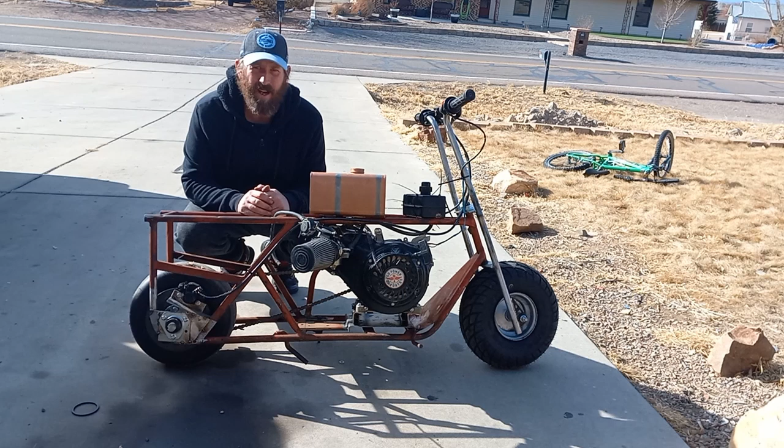Today we're going to try to get a fuel system put on this bike. Apologize for the wind - it's this or snow the next few days, so this is what I got. This little tank here works, but I don't like the way it looks. I want it contained in the frame, and I want to fill some of the void in the frame. So I got this old Briggs & Stratton tank that I found in my grandpa's basement, actually, and we're going to mount it in the frame right here. That's going to make our outlet for the fuel lower than the carb, so we're going to throw a pulse pump on there as well. Let's get to it and get this fuel system put in here.

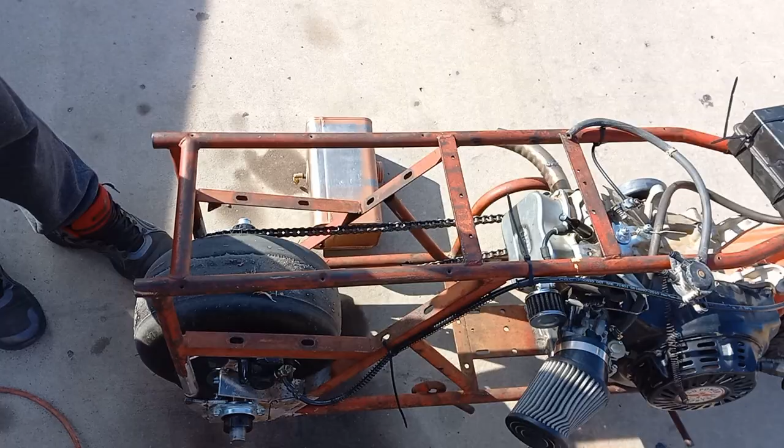So now I'm going to be doing some welding. The first thing I'm going to do is clean the paint off around this rectangle here, because I want to center that tank in there. So I'm going to clean up the metal around where we're going to be working first and take some measurements.

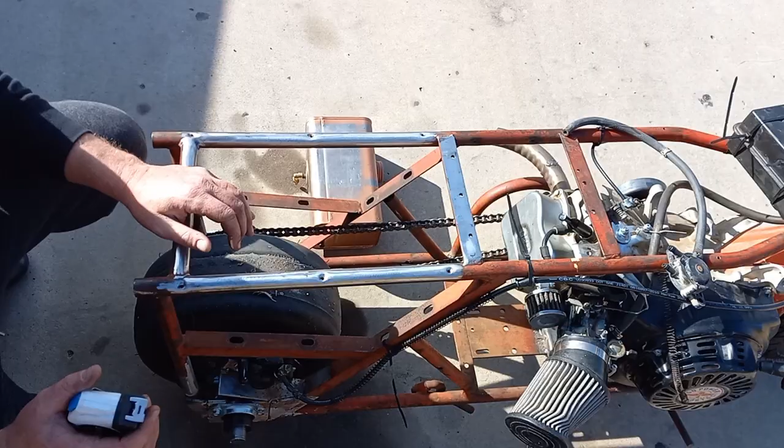All right, we got that all cleaned up. Now we're just going to mark center on these two here and these two, and it's going to be in inches. Just kind of go from the center of the bars.

Close here, about 9 inches, so we'll mark this one at about 4.5. 9 inches, let's get 4.5 again. So this way we'll go from this bar to the center of that one, right up against it - 14, 7 inches. About right there. 14, so 7 inches, be about right there.

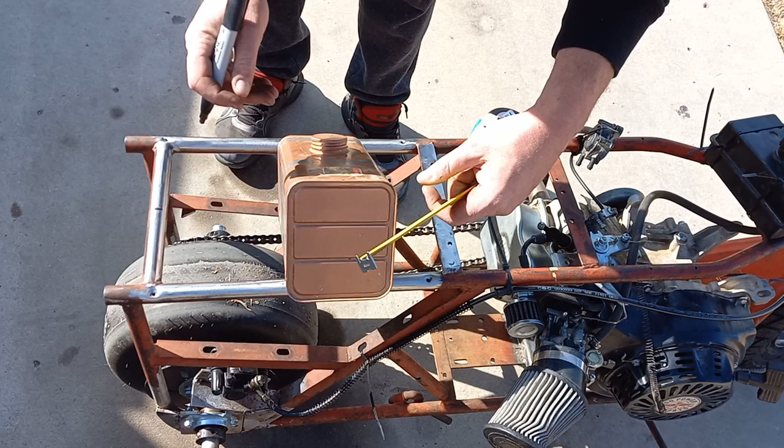And we'll do the same to the tank here. We got 4 3/4, half of that is 2 3/8. Mark it there, and we'll mark it there. Now we'll do the same along this side here. We got 9 3/4, be 9 3/4. Half of 9 is 4.5 plus 3/8, it's going to be 7/8. 4 7/8 there, 4 7/8 there.

So we got our center of the tank. What I'm going to do is just eyeball line up those marks as we go here. I want that tank sitting right in there like that - actually, probably turn it this way. I want that tank to be sitting something like that by the time we're done here. How are we going to do that? Well, I picked up the flat bar here. I'm basically just going to make a saddle for that tank to sit in, and then I'll bolt the strap across the top. We should be happy. So let's get to it.

The first thing I want is the distance between the bars here. We got 8 1/4 minus our tank, which now I'm getting 4 13/16. Math, stupid.

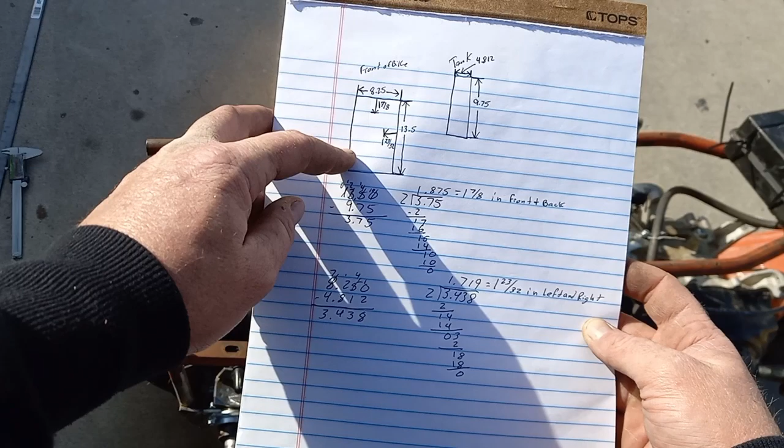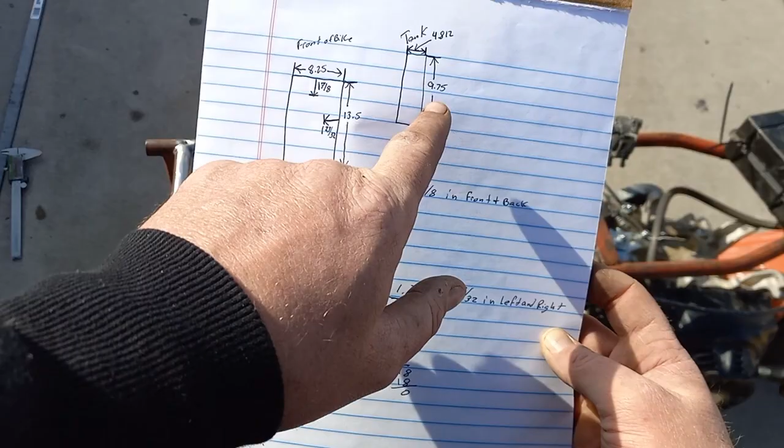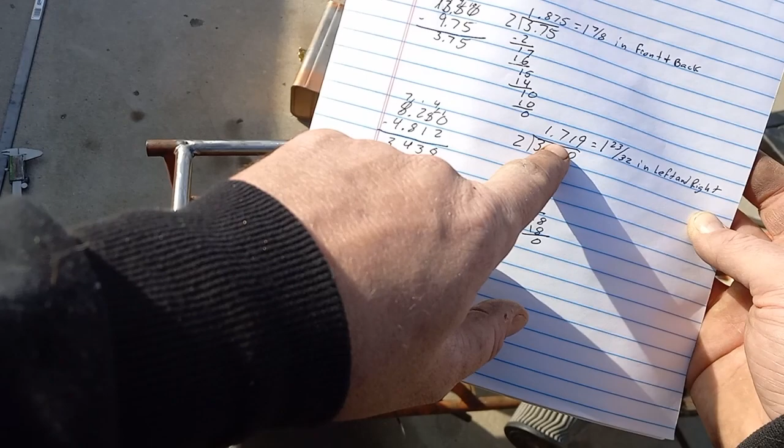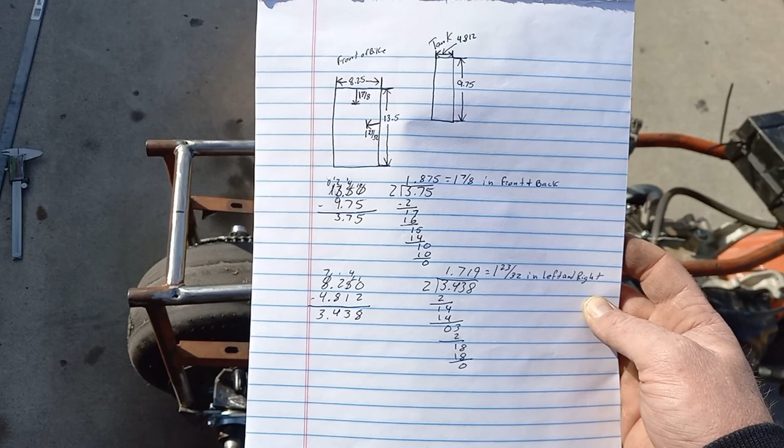All right guys, so I took a second to take some measurements and do some math. This is what I come up with here. So this here is the frame, 8.25 wide, 13.5 long. Here's our tank, 4.812 wide, 9.75 long. So I took the widths and subtracted them here, and that gives me how much space I'm gonna have between the rails and the tank. Then I divided it by 2 to get how big the gap's gonna be on each side, and that's what I came up with there. Did the same thing for the length - length minus the length divided by 2 gives me this, and that's how far it's gonna be from this rail and that one. So I don't know, math, could be wrong, but it'll get me in the ballpark. Math, stupid. So let's just get started here.

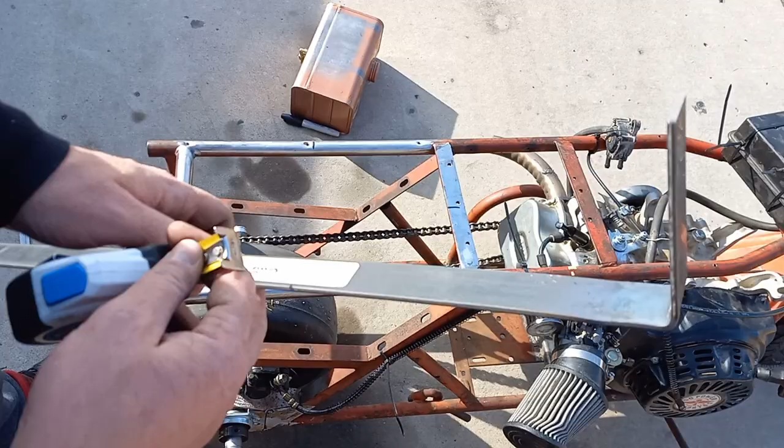Got that first bend done, the next bend done. So this next one we need at 9 3/4, and it's a little more critical than the last one. So we'll get that bent and be right back. Dang, check that out.

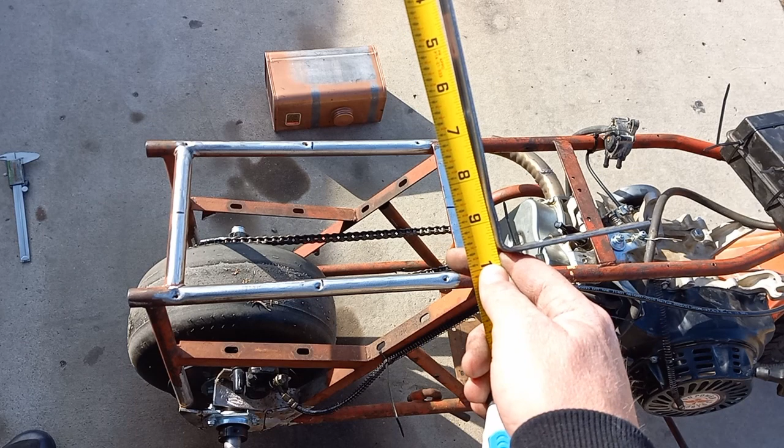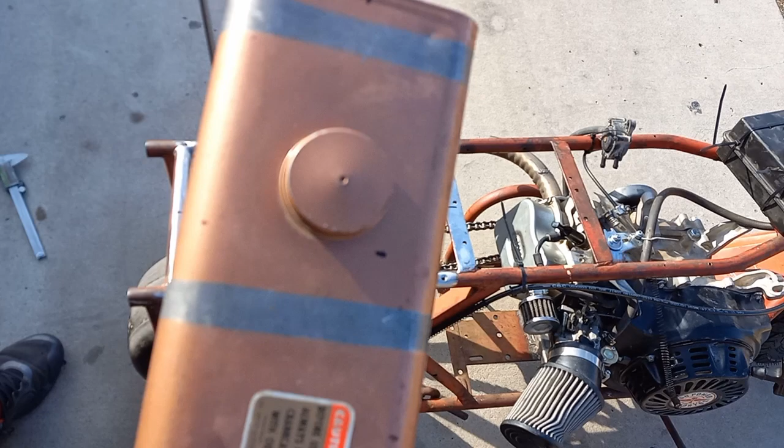Nailed that one. Now we need to bend this part to go under the bottom of the tank. There's our next bend there, and that tank sits in there just like that. Now we just gotta bend a tab like this one over here, and that'll be our first bracket done.

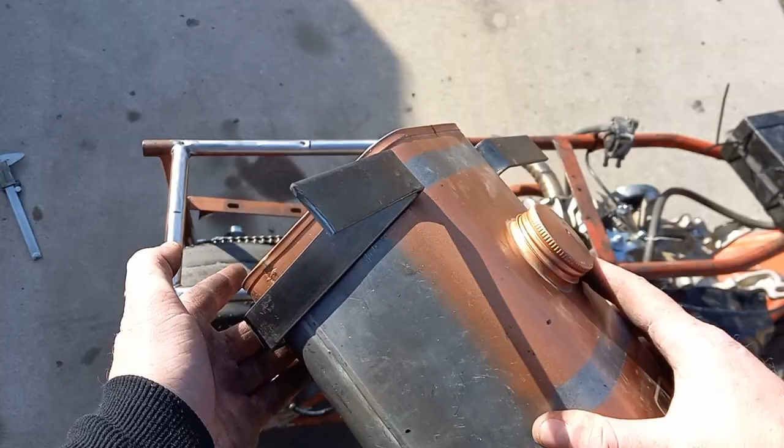We'll measure 3 inches off this way, cut it off. There's our first bracket, tank sits in there pretty nice. And that's just gonna sit right there. Now I need to make another one for the back side, so let me get that knocked out real quick and we'll bring it right back.

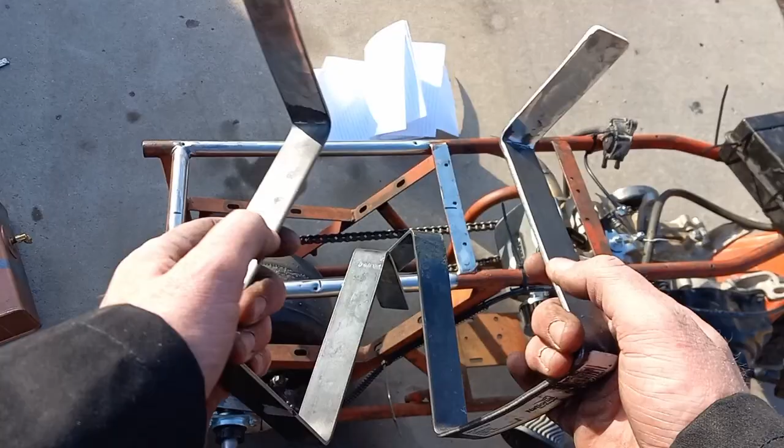We got both of our brackets done. Got my tabs cleaned up, corners rounded just a little bit.

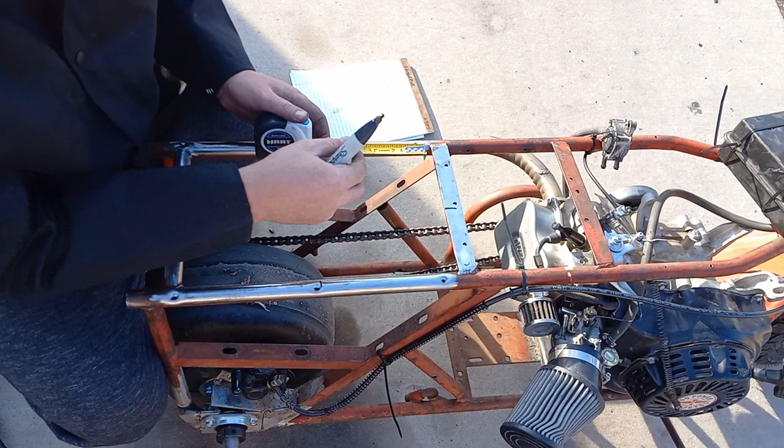Now we're gonna do a little bit more measuring on the frame here, decide where we want these. So just do some measuring here. All this is super precise. 1 7/8 inches there. 1 7/8 inches there, so that's where the end of my tank should be. The same from this side here, about 1 7/8 inches.

Feed it over here. 1 7/8 inches. So that's where my tank should land, is here to here, front to back.

So we'll mark 1 inch in over here. We'll mark 1 inch here. Mark 1 inch there. And I'll mark 1 inch there. So that's where I want these to go. Like that. We'll get that tacked in there.

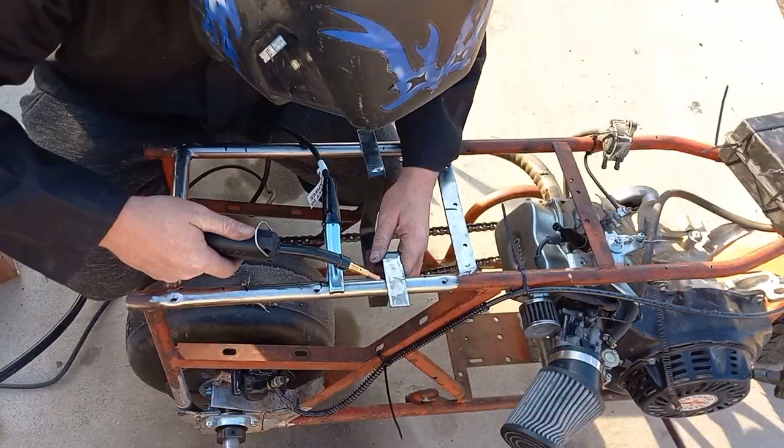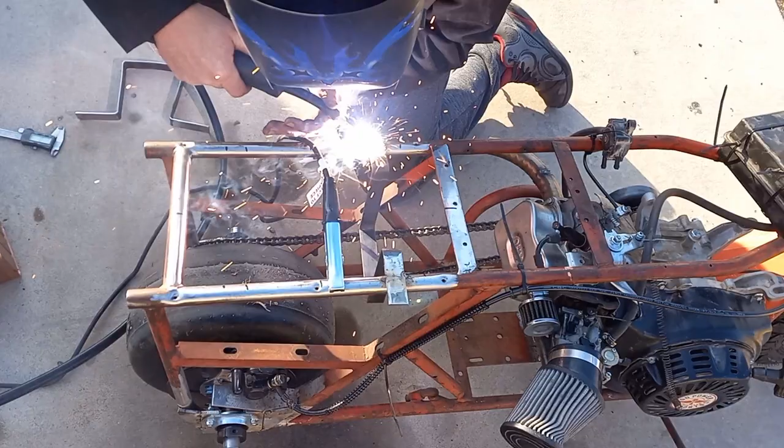Do this one just a little bit different because that didn't work very well.

We got those tacked. Now I want straps to go from there to there, and we're just gonna cut them at 9 inches, I guess. So I'll get those cut and I'll be right back.

All right, we got it all tacked, we got it all drilled. Now I do have a plan for the little tabs we got hanging off here. I'm gonna heat them up with the torch and try to wrap them around that bar. So let's do one of those.

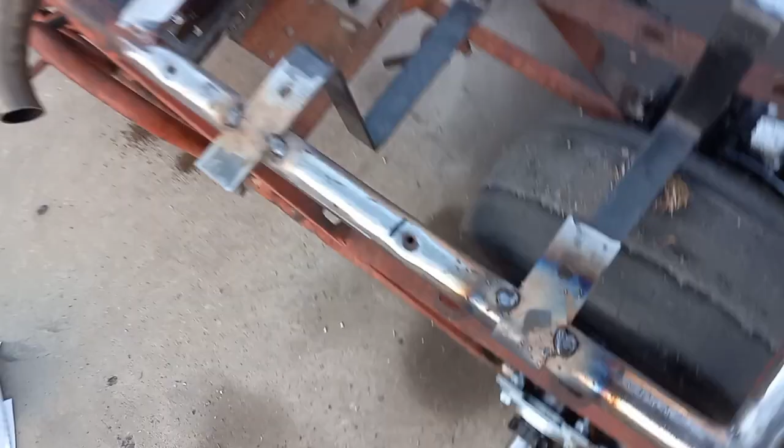So there you go, there's one. Wraps around. Now I can weld it all the way around, and I'll repeat that on the other 3 sides, and then I'll bring you back. Got them all bent down. Now it's gonna take a second, and I'll just weld them up.

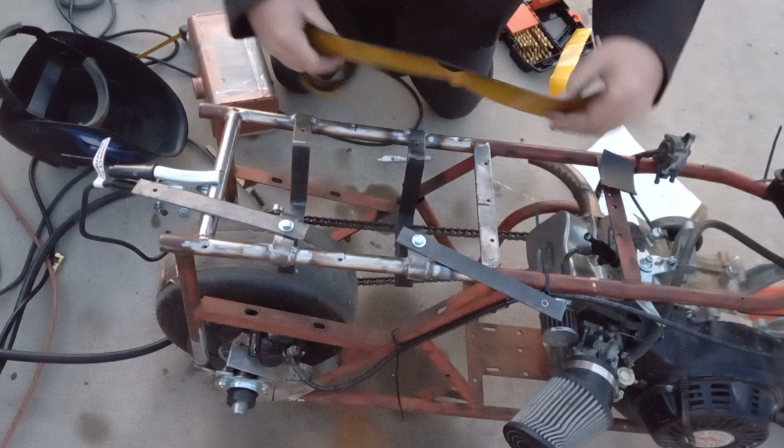So thankful. So I already did this side. Got some of this foam insulation tape. All I'm doing is getting a rough idea of how long we need, ripping it, peeling it, and sticking it on there. I'll follow one edge all the way down, all the way around, make sure it's stuck down really good.

Tear it off even, and I'll rip off the extra around the back side here. I'll put some on the bottom sides of these too. Now hopefully that tank will fit.

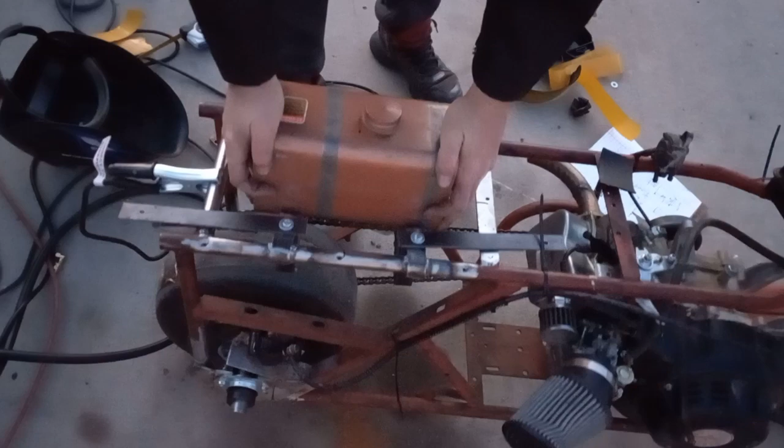And that's her final home. All I got to do now is tighten up those 4 bolts, and that tank is done.

Alright guys, so that's going to do it for this episode of Nick's Mini Bikes.